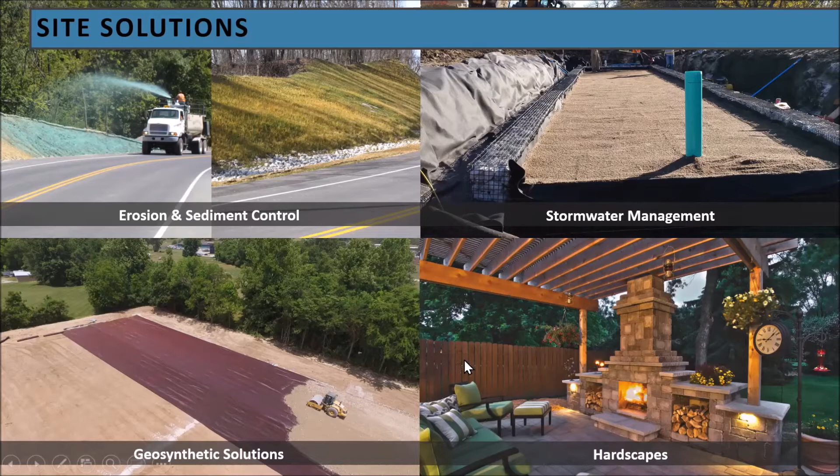Then some secondary markets, I say because it might be only with one company, like Bowman Construction Supply has a bridge division that does expansion joints and bearing pads, also has a big waterproofing division. So that's drainage as well as membranes, et cetera. So really have quite the wide range of site solutions to help you solve any of your project problems, take care of any issues at all.

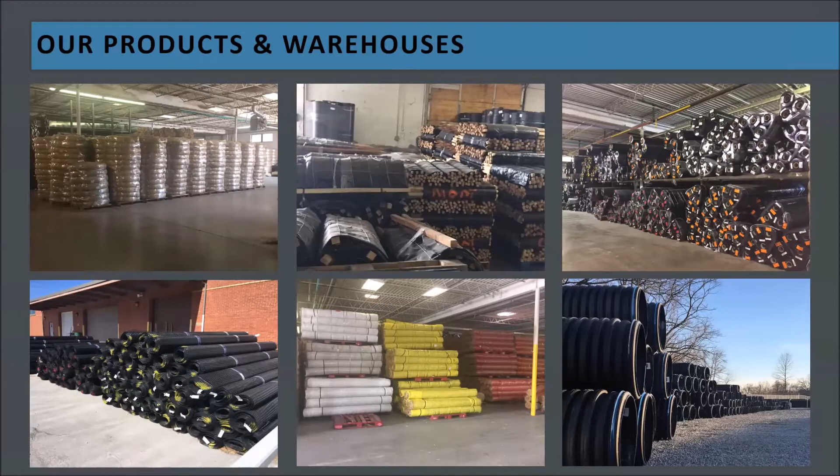Probably one of our big values is, besides that technical support we supply, we also have a significant inventory in those 9 warehouses. I actually looked this morning, and today we're just under $13 million in inventory in those 9 locations. So we have significant products sitting on the ground to support your projects and make sure that we can take care of anything that you might specify. And those products also are some of the premier manufacturers in the country. So TenCate and Mirafi, Profile Products, North American Green, Presto Geosystems, Flexamat, all those that you see there, Tensar, those manufacturers also supply great technical support.

So that's where that support comes from, manufacturer support, as well as our technical sales representatives, our engineer, and then our comprehensive websites. Each company has their own website, so you can see the links there.

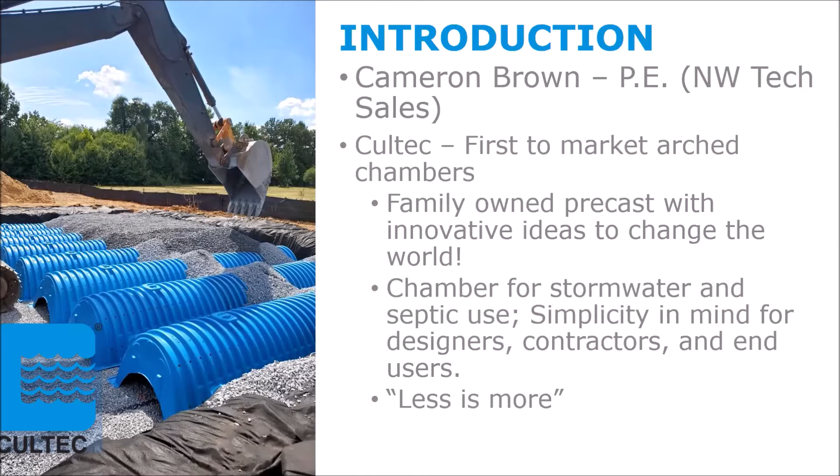And shortly after bringing that product to market for the septic applications, the phone started ringing from civil engineers inquiring about using the product for stormwater purposes. And from there, the stormwater solution innovation from Cultec took flight, and we're a very proud manufacturer. We strictly manufacture chambers, and we really believe that less is more. There's a lot of ideas out there about what a complete chamber system requires, and we'll go into that a little bit more later, but suffice it to say that throughout this presentation, you'll probably find a moment to appreciate that mantra, that less is more.

So that innovation took place back in 1986. And so for nearly 35-ish years, the company's continued to innovate. And here are a few hallmarks. It started out with the small chamber there, the Contactor 125. And over these years, we've added several more septic chambers, but more importantly to this discussion, numerous stormwater chamber models ranging from 8 inches in height all the way to 48 inches in height, and 8 different sizes within that range. So we believe we offer a very comprehensive size solution for just about any setting.

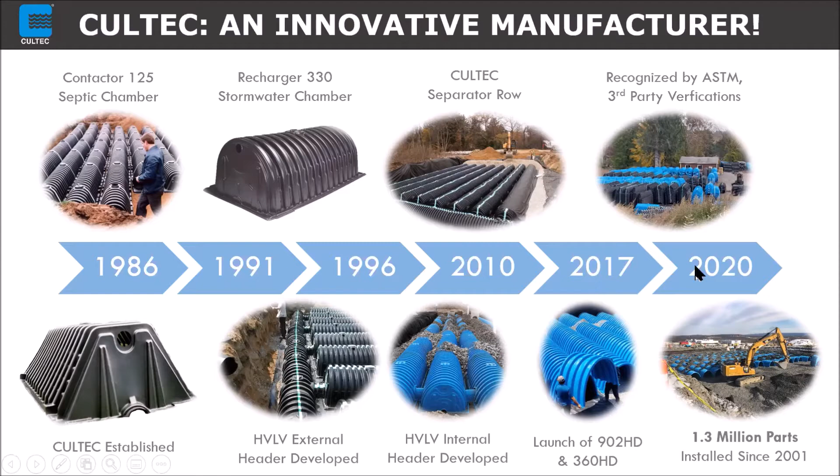And the company still continues to innovate and pursue verifications and so forth. As we know, continuous improvement is definitely a thing these days, and Cultec is totally familiar with that attitude. So just briefly, for those who may not understand, why are we using chambers, and what is this all about in the first place?

So these products are intended for the purposes of keeping stormwater on site where the rain fell, so that we don't have downstream issues with flooding, with erosion, and there's a variety of hydrologic outcomes that arise when a site is developed, or in other words, when it is changed from a field or even a dirt patch into a paved parking lot with a structure and a roof. And now all the water is essentially shedding from the site rather than soaking in at the site.

And what these products do is provide an opportunity to capture that water, to store it on site, to let it infiltrate, and/or to meter the water out from the site at a controlled rate that is within flood control parameters. Historically, this objective has been accomplished by building a surface detention pond. And we still see a lot of those these days. But the closer you get to a heavily urbanized area, you'll find that real estate values are very high.

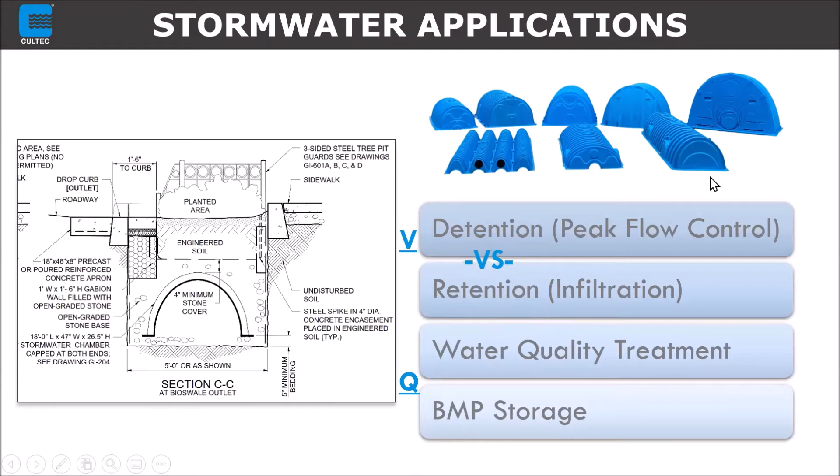But to install these systems, you're going to excavate a trench down to a set elevation, and it's just going to be surrounded by native soil. Obviously, we're putting it in the ground in place, and then after that trench is excavated, we're going to wrap that trench with a non-woven geotextile. So typically like a 4.5 ounce non-woven geotextile, and it's wrapped all the way around the trench for the purpose of keeping the fines in the native soil from migrating into the void aspects of the stone bedding. So that's the first fabric application.

The second fabric application is this woven geotextile, which is placed directly underneath the chambers of the separator row, which we'll touch on a little bit here in a second. Typically, that's really only under the separator row.

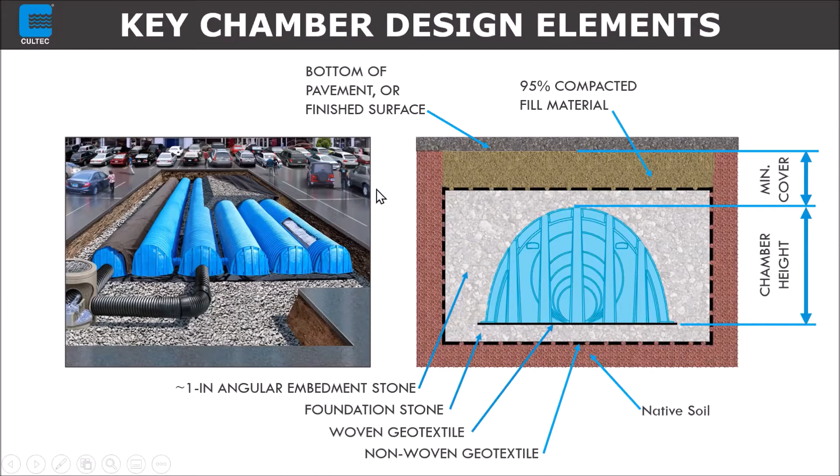So those installation features and so forth, they all work with all 8 of our chamber sizes here. So as I mentioned, 8 chamber sizes ranging from 8 inches to 48 inches in height. And there's a lot of versatility with the product line when we have this many sizes, because as you know, sometimes you're designing sites that have shallow groundwater, shallow outlet, bedrock, whatever might be the case. And you might not want to jump all the way from an 18-inch chamber to a 30-inch chamber. Maybe a 26-inch chamber in the middle of that is great, or a 20-inch chamber.

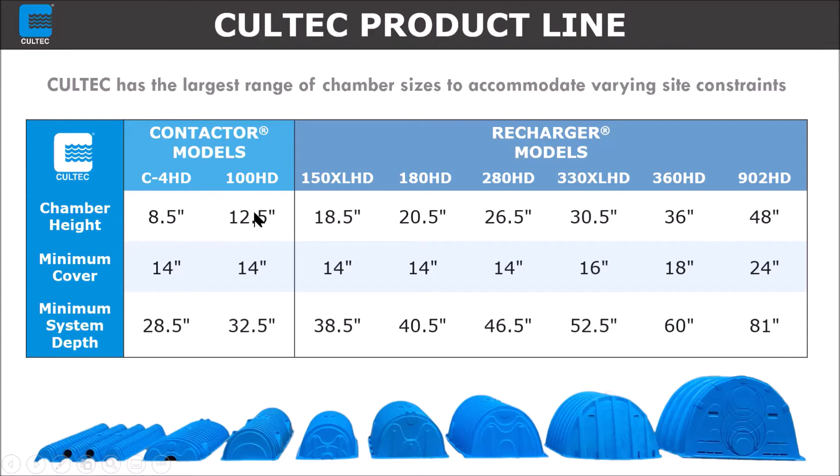So across the top row there, you can see the heights of the different chamber models that we offer. They're really nominally 8 inches, 12 inches, 18 inches. The reason you see 8.5, 12.5, 18.5 is because we have our inspection port knockouts on the top of the chamber. That's where you would connect an inspection port if needed. And those do bump up a little bit, but everybody refers to these as an 18-inch chamber, 20-inch chamber. You can kind of neglect the 1/2 inch.

So maybe a question that comes up, at least it does in a lot of presentations that I give, is, why would we use chambers? Why couldn't we just use perforated pipe or some of these concrete modular systems? There's a variety of different products out there. And frankly, I think they all kind of have their place. The reason chambers are available in the marketplace is because they've proven their versatility and their economics.

So if you were to consider some other products, why were chambers selected? Well, first of all, let's just look at the capacity and the economics of that capacity. With that much water, what are your other options? If you went with a perforated pipe, you would need several hundred to potentially a couple thousand feet of perforated pipe, depending on the diameter that you're using. And then assuming it would be larger diameter for a large system such as this, you'd be talking about multiple truckloads of product being delivered and staged on site.

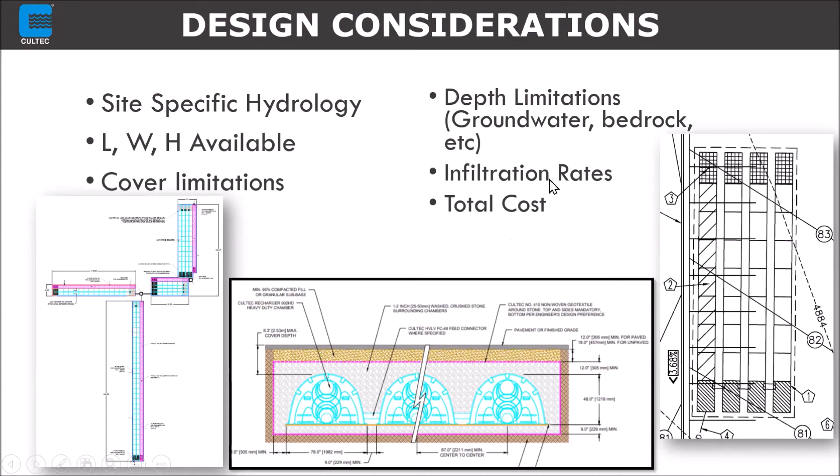So what does Cultec offer to engineers specifically, or anybody else who's trying to figure out some solutions? We really have, I think, a pretty good website. I think it's resourceful. I think things are relatively easy to find, but I always welcome the feedback that, hey, this really seems like it's in the wrong place, or this wasn't as helpful, or I just straight up couldn't find something I was looking for. And we make adjustments. We've made some adjustments here in the last 2 weeks based on some input that we got back. So I think we have a great website.

You can typically find resources for design guidance, for installation guidance, information about each chamber model, how it's configured with the bedding and the minimum bedding and soil cover and just spacing and all those kinds of layout considerations. We have contractor resources like the installation guides.

We have a link that I could probably send out later, but it's called our quick reference page, and it's a clickable PDF, and it's basically organized in a format that is pretty easy to follow, and every piece of literature that we offer is on that PDF somewhere, organized either by chamber model or by engineering resources or contractor resources, whatever. And it's clickable, so you can just hit it and it'll take you right to the document in PDF form online. From there you can download it, store it, whatever.

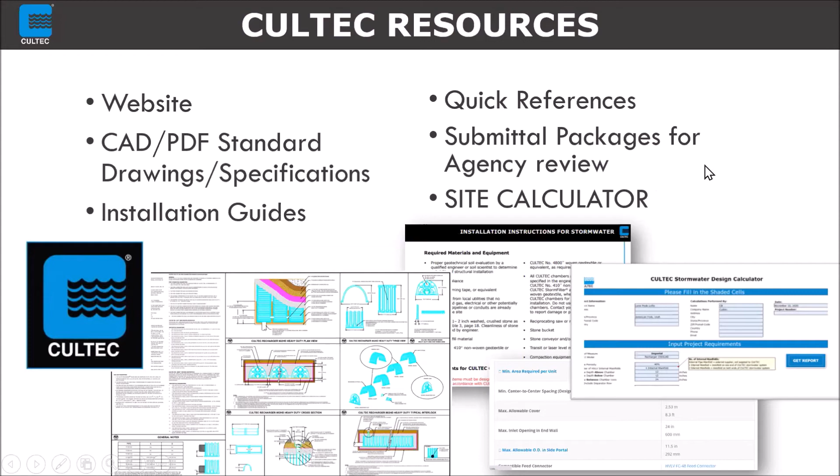So really what I just wanted to kind of hit on here, this is kind of one of my last standard slides, is the difference that Cultec brings to both the design and the construction phases of the projects. It really is a company that wants to be a partner. We don't want to be a bulldog. We don't want to tell you how to do your job. We don't want to tell you how a design has to be. We make a product. And we let engineers and designers fit those products into their plans as they see fit.

For example, if you look at the middle picture on the top row here, the integral, or excuse me, the picture to the left, the internal manifold.

We offer this internal manifold. We don't require it. A lot of engineers understand that these systems are just like a bathtub, and it fills up with water and then it drains. And there may not be a need for some internal manifold connections. Some other engineers do believe that, hey, you know what, if I'm going to have an underground utility, I want access to every part of it in case I ever need it.

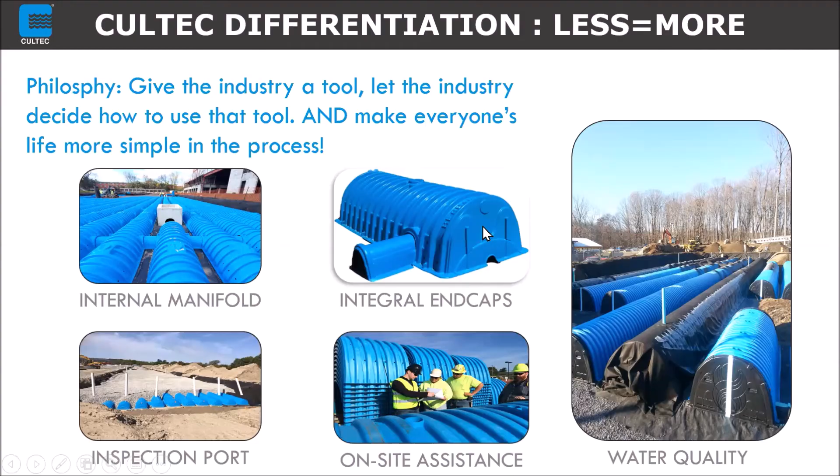We're about at 50 minutes. Where are we at, Don? Yeah, it's 10 after, so we got about 10 more minutes. Okay.

Maybe screenshot this if you want, but this is just kind of a flow chart of how Cultec can get involved and help you with your design processes as you're getting them approved with your local authorities and so forth, as well as what we do to be on site when the project is being installed. We can jump in at any time. I'm helping engineers right now who don't even know where they're going to put their system, and we're trying to figure out where's a good place. They're up on a hillside and they don't want to induce landslide hazards. And okay, well, maybe we do it with a line.

So we put our heads together, and I'm a big fan of putting our heads together and making sure that the considerations are well vetted. And we can really be a part of your process, whether you're in a concept phase or even a final phase. And frankly, I frequently get involved with this even as a post-bid value engineering phase. And occasionally, we totally shift directions and go a totally different way than what was originally anticipated. So whatever the case may be, we're wanting to make ourselves available for that.

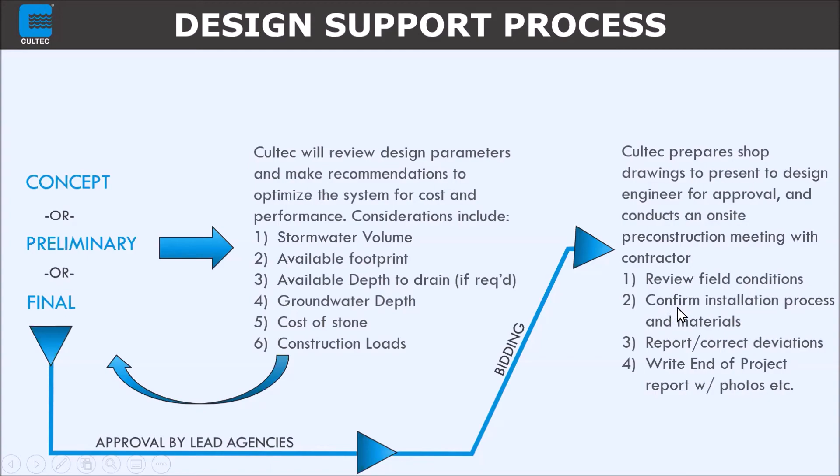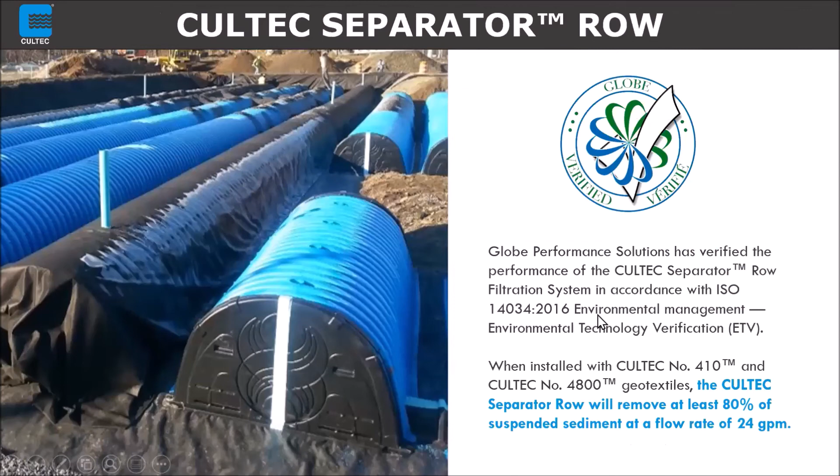There's a lot of other slides here that might actually just be better for questions that come up or whatever. So Don, if that's all right, you can initiate that. And before you jump in, I just want to invite any question that is out there. Don't be shy. I'd love to see what I can do to clear your mind of anything that seems fuzzy.

Yeah, the first question we have is, where is the product made and how is it shipped? So the product is made in two locations in the United States. We have manufacturing in Wisconsin and in Ohio. Typically, we're shipping these a truckload at a time wherever they're going. And I always get the question, well, doesn't the freight add a ton of price? Well, the answer is, yeah, we pay for freight in the process, but certainly every other manufacturer is paying for freight as well. So it's not really a disadvantage.

A lot of the products that we sell are made in the same places as some of our competitors. So they're all coming kind of from the same place. And then when you compare it to alternative products like perforated pipe or some of these concrete modular units, yeah, they have to be made somewhere and shipped from point A to point B. But the nice thing is we get so many of these units on a truck that even shipping from the Midwest to just about anywhere in North America is pretty inconsequential to the overall project budget.